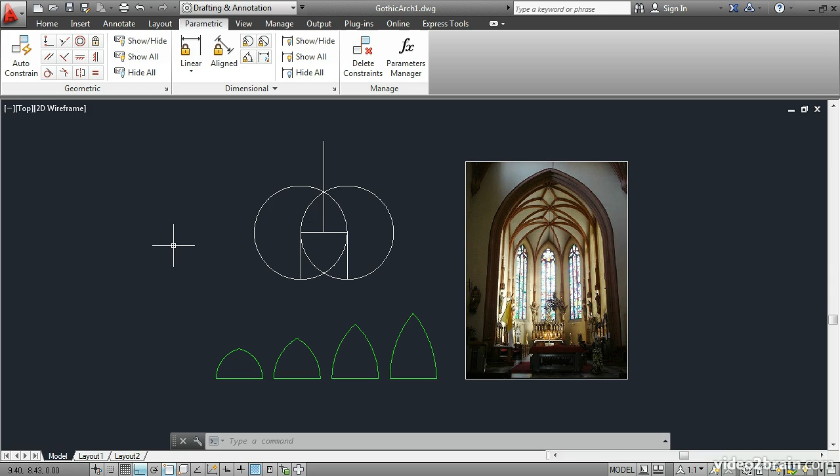You can apply constraints to geometry in order to limit the ways that it can be dynamically edited. In this lesson, you will apply a set of geometric constraints to circles and lines in order to assist in designing ogives, which are better known as Gothic arches. The ogive shape is used in woodworking, architecture, and in the nose cones of rockets and bullets.

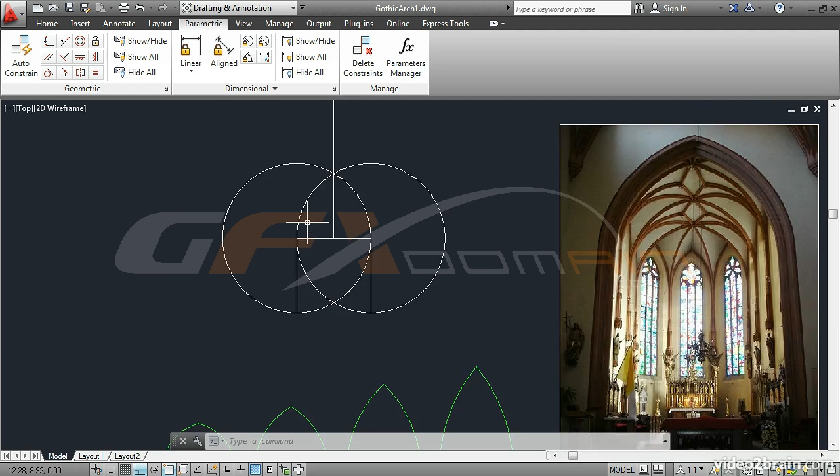Open Gothic Arch 1 to begin, and then select the Parametric tab on the ribbon. Zoom into these circles in this area, and we can apply constraints manually by selecting one of these types: coincident, collinear, concentric, fixed, parallel, perpendicular, horizontal and vertical, tangent, smooth, symmetric, or equal.

Or you can have AutoCAD automatically apply constraints to the selected objects. You want to be careful not to over-constrain things, however, or you won't be able to dynamically edit it. In this case, click Auto Constrain, and then select the right-hand circle and this vertical line on the left. Click Enter, and we have 3 constraints that have been automatically applied.

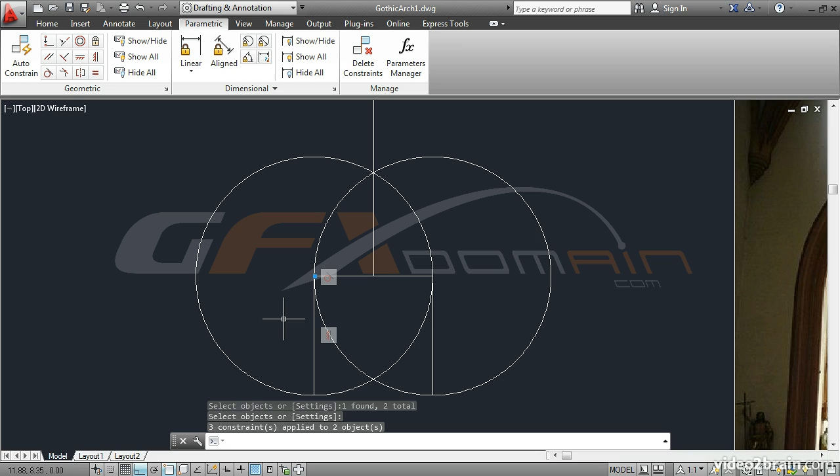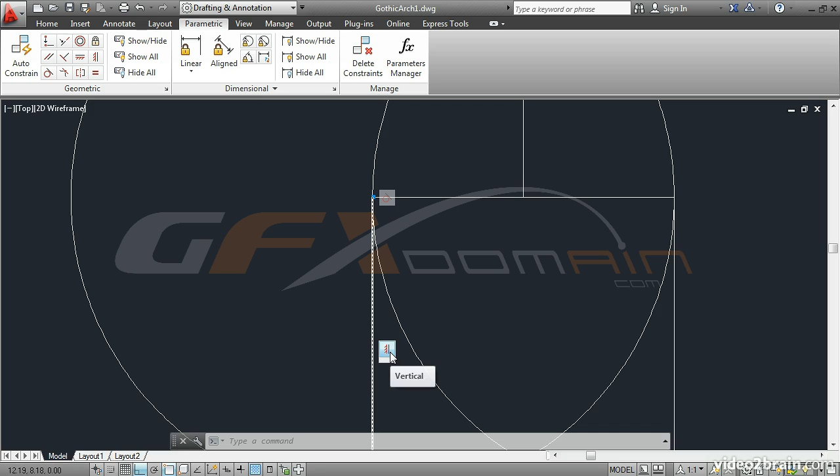The first one is identified by this little blue dot. It's a coincident constraint because the line and the circle are touching at that singular point. There's also a tangent constraint because the circle and line are tangent at that point as well. And there's a vertical constraint applied to the line.

Now watch what happens if we try to move the circle here on the right. I'll select it and move its grip. The vertical line moves with the circle now because of the geometric constraints that were applied. Press Escape and undo.

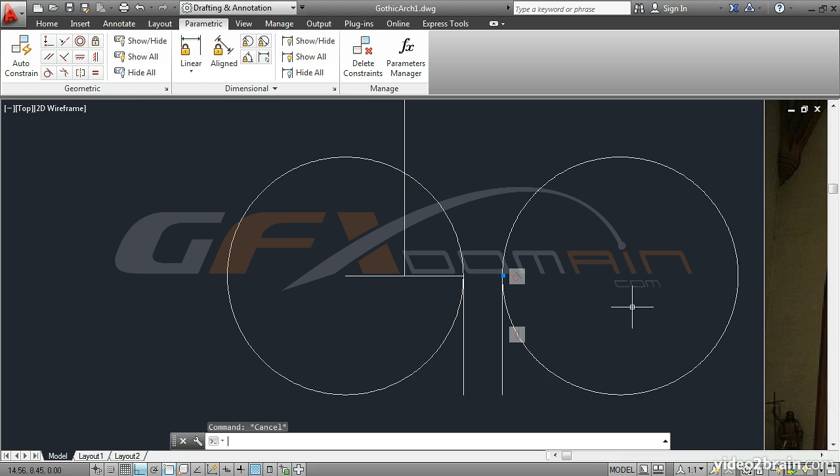I'd like to apply a couple of other constraints to limit the way that these objects work together. I'd like to keep the vertical line fixed in its position. Click this icon up here for Fix. It's a padlock. And then select a point on the vertical line. It will highlight in red to indicate that you can fix the line there. Just click, and then you'll see that there's a badge that appears here with the padlock.

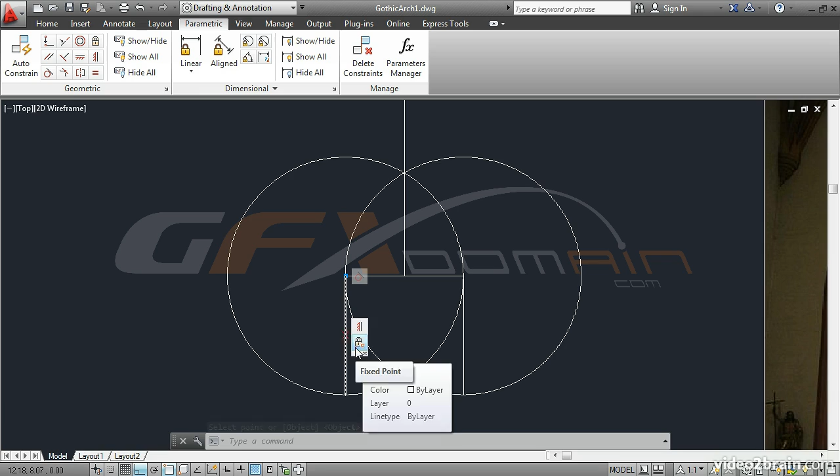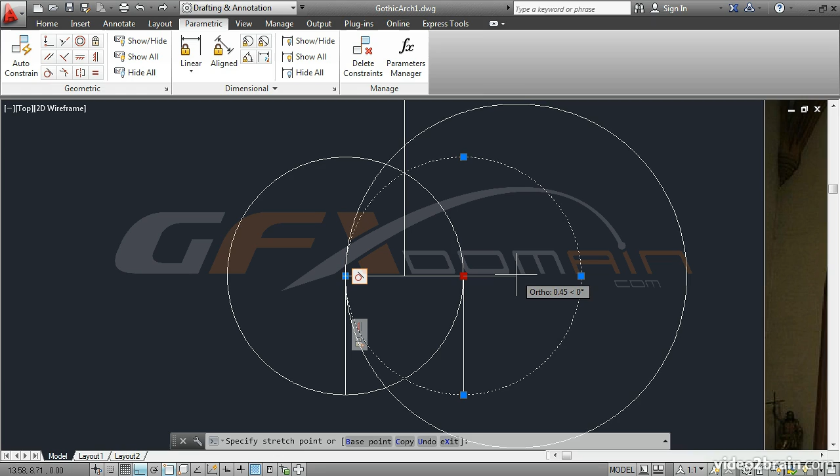Now go ahead and select the circle again and try to move its center point. Click the grip and move it to the right. Something different happens now because the circle can no longer move. Its left edge is fixed to that line, or rather, its left edge is tangent to the line, and the line is fixed. So this system of geometric constraints changes the way that objects can be edited dynamically.

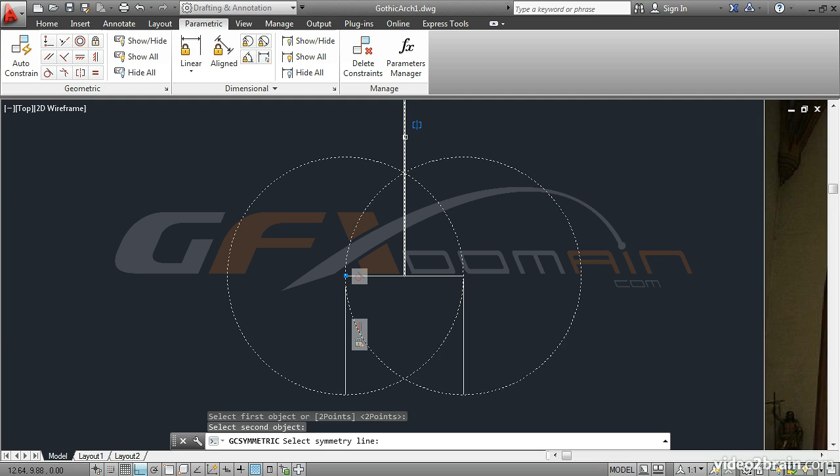Press Escape to deselect. I'd like this other circle to be part of this picture. To do that, let's assign a symmetric constraint. Click this icon, and then select this circle, and finally this vertical line as the symmetry line. 3 new badges appear indicating the symmetric line and the 2 symmetric objects.

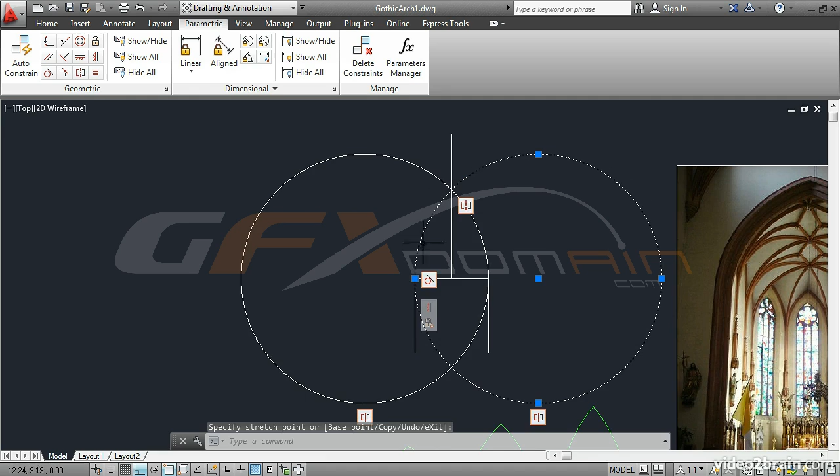Select the circle on the right and try to move its center point again. Now we get a different behavior. Both circles are stretching in a way that is creating this ogive form in this area. Press Escape to deselect. Save your work as Gothic Arch 2.

So in this lesson you learned how to apply geometric constraints and now understand what they are used for.